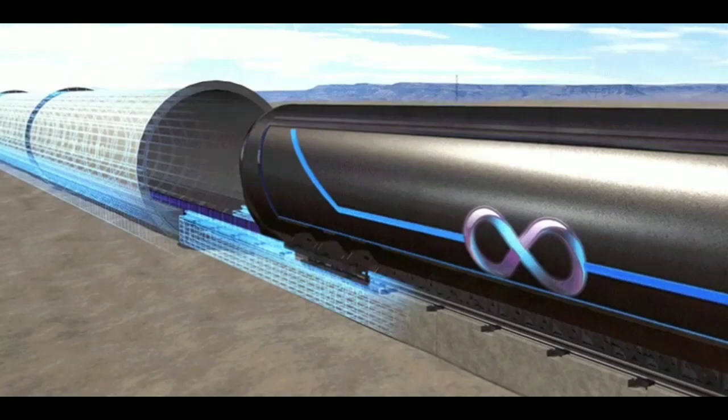Elon Musk's idea of Hyperloop is a reinvented creation. It came from the history of American offices and banks, as they have used PTT, the old technique of Hyperloop, called pneumatic tube transportation, for transportation of drugs, mails, files, and disk drives, etc. This was invented by William Murdoch.

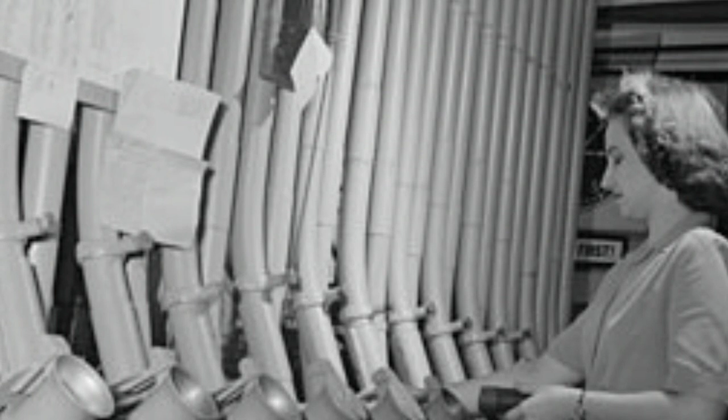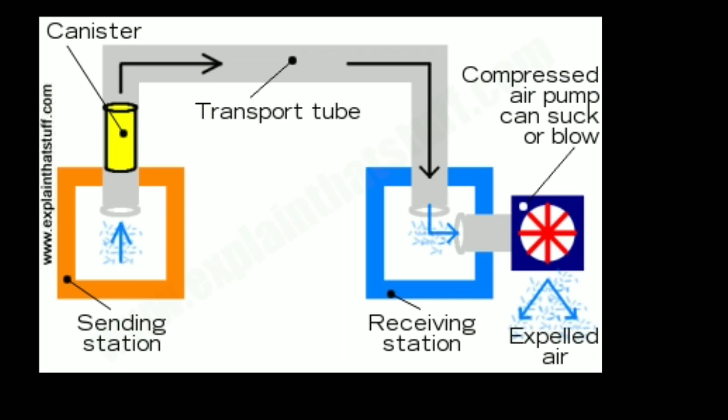This PTT propels cylindrical containers through a network of tubes by compressed air or by partial vacuum. Still, some banks are using this PTT transportation for their secret physical information packs to get rid of cyber attacks. This did not get into popularity due to heavy work and not being as fast as possible.

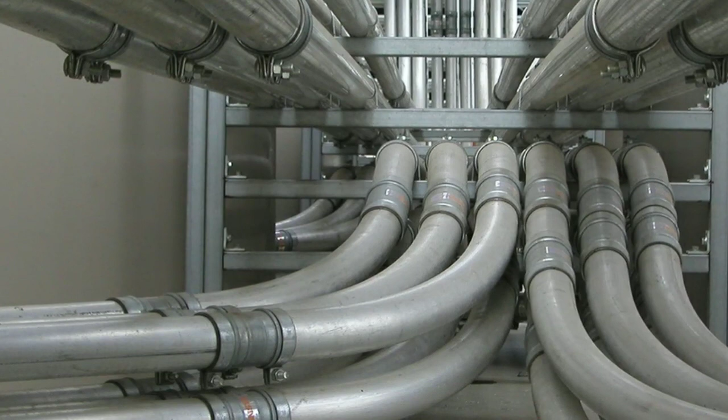These tunnels are a vast network of tubes in the underground. As this makes us limit our heights, we cannot redirect. A single tunnel is for a single route. We can't use it in intervals. These limitations were taken into account by Elon Musk, who proposed it as Hyperloop.

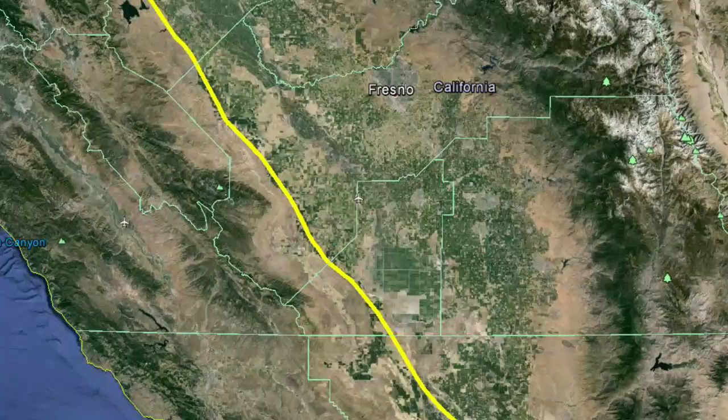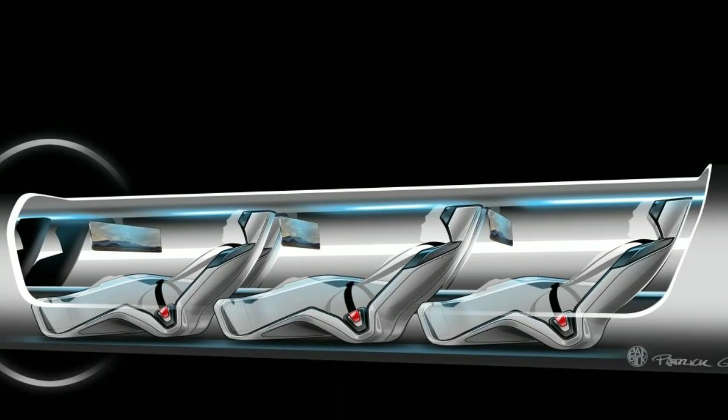The Californian government proposed a railway project from San Francisco to Los Angeles, and this takes lots of billions to construct and much more area to accommodate. The Hyperloop is the only way which takes less space, is less expensive and acquires high speeds.

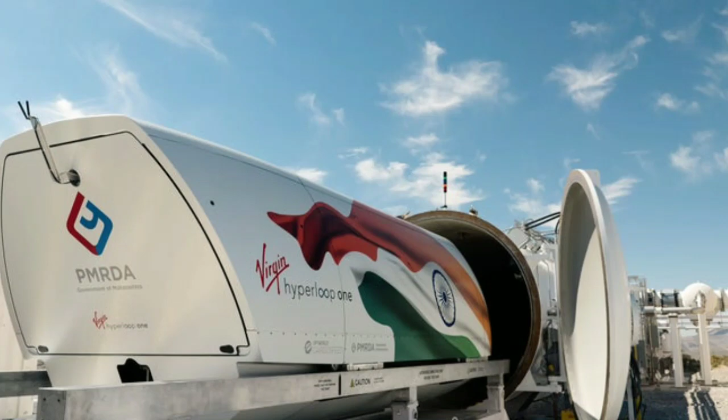This is the latest technology, which is constructed with two tunnels to and from San Francisco to Los Angeles. These two tunnels are placed on pylons and stacked on pillars. These tunnels are embedded with solar plates, which make energy for the transportation of Hyperloop capsules.

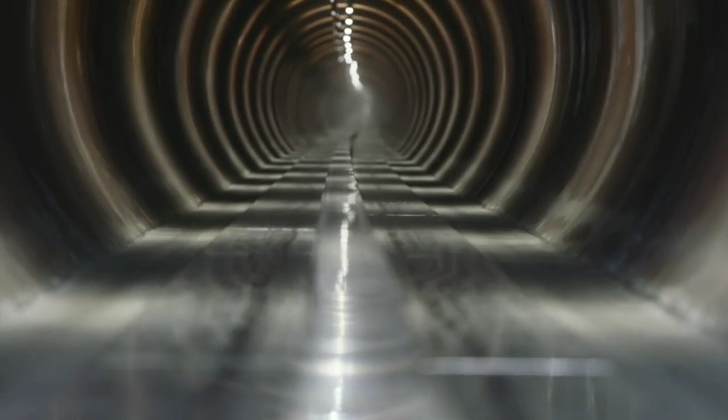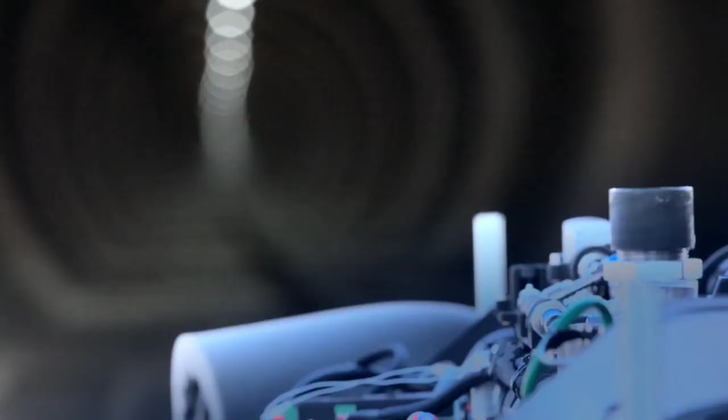These Hyperloop capsules have to transfer pressure from one side of the tube to the other side. So they have to overcome the Kantrowitz limit, which is the limit of pressure transfer in tubes. This is a physics term for the hydrodynamics in tubes. The hyperpod or capsule has to travel like a fluid inside the tube.

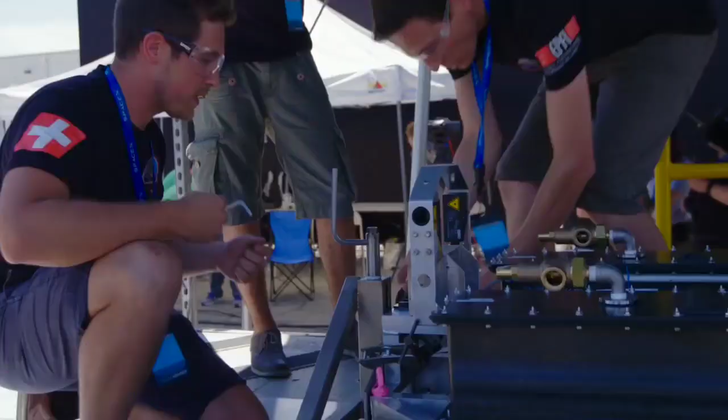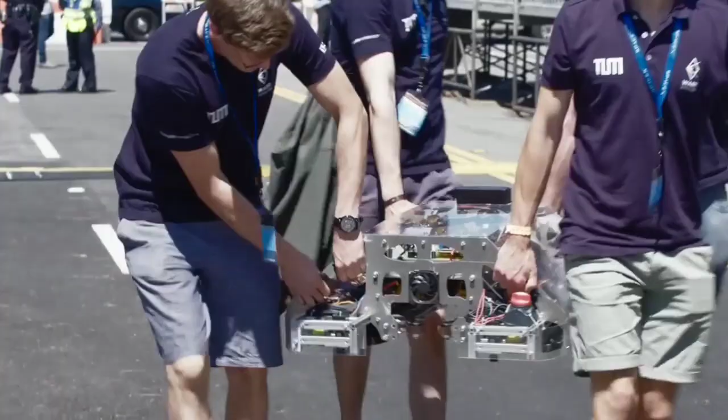So it attains 20 miles per hour with its linear induction motors. When it attains that top speed of 20 miles per hour, it has to levitate. This levitation takes place by its inductive magnetic motors, which create a magnetic field inside the tube, which makes this capsule levitate and attain its miracle, that is frictionless transportation, which is non-wear and tear transportation.

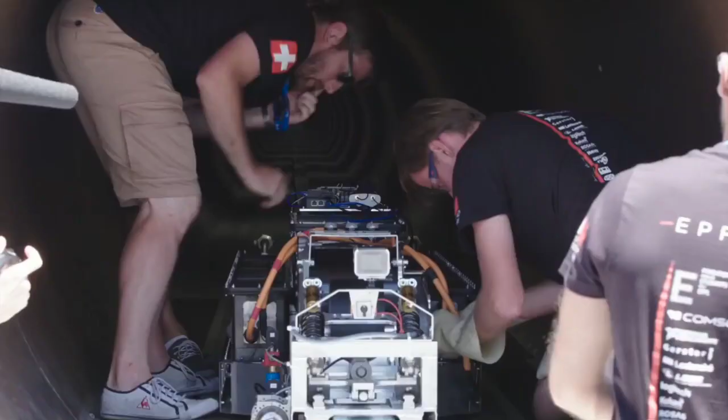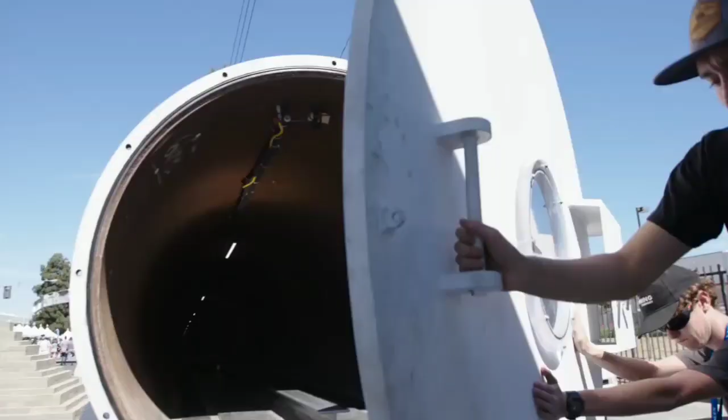The levitation of this pod makes it achieve a high speed of 700 miles per hour, breaking the record of the latest bullet train, maglev. So Hyperloop became the best idea for the Californian government to implement for its rail project.

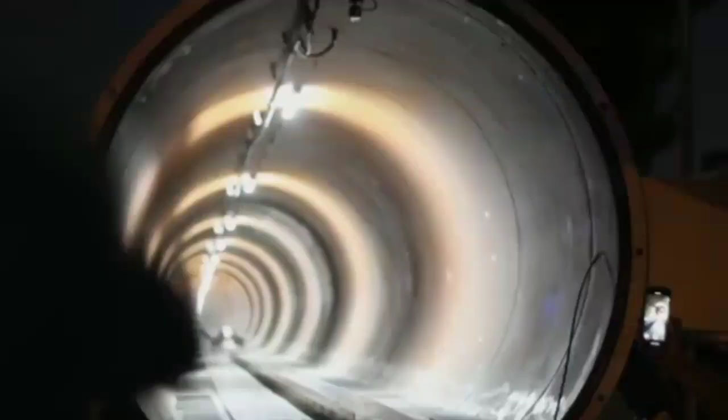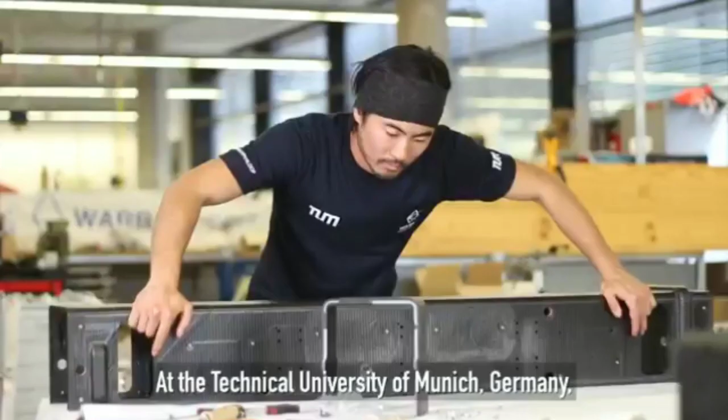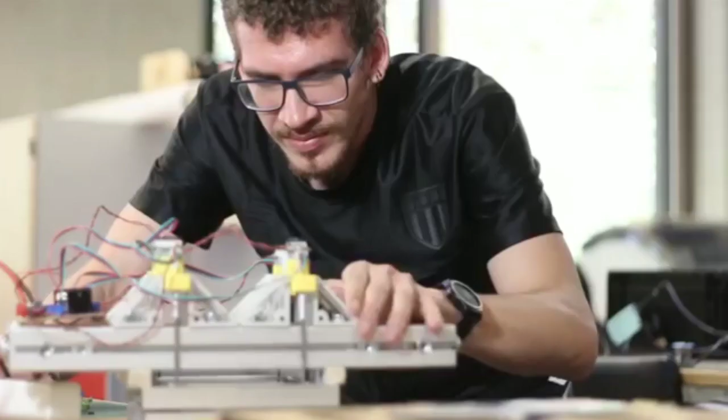In Germany, a team of students is working on a new transportation concept called Hyperloop. I do think that we are changing the future of mobility. It's definitely very crazy. It's also a lot of fun and a lot of hard work.

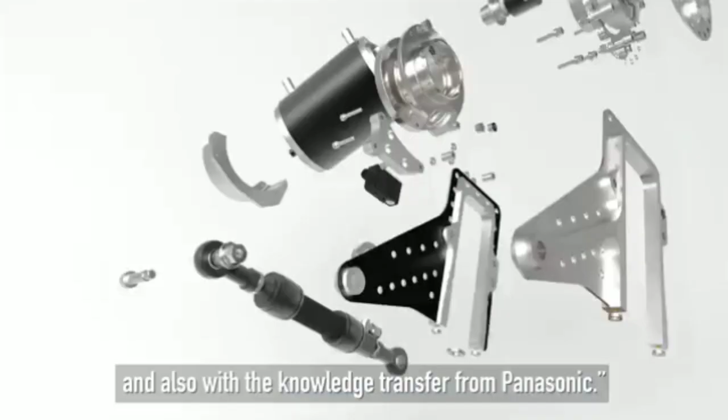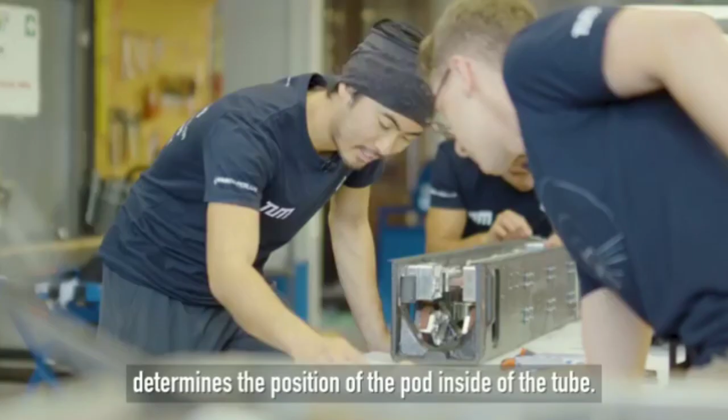A sensor from Panasonic Industry determines the position of the pod inside of the tube. To achieve this, the laser reads several markings within the tube while it accelerates to a maximum speed of 600 kilometers per hour. The specific design challenge for us is not only that the laser reads the marks, but also that this information is processed at a fast rate.

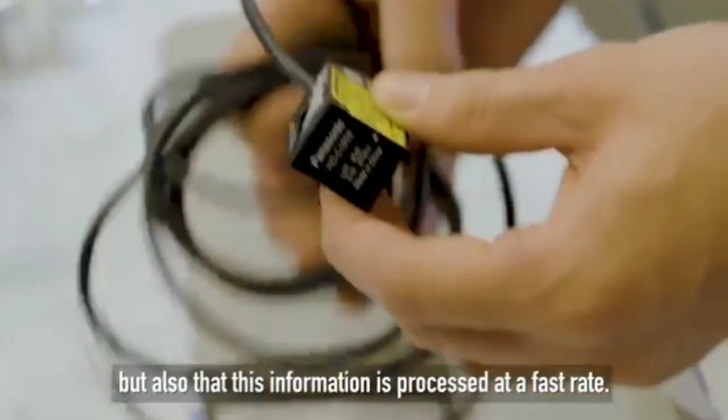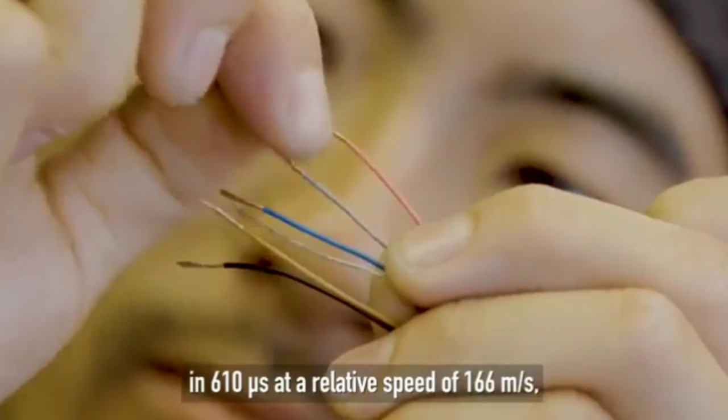The detection of these marks had the strictest timing requirements of any of our tasks. The 10 centimeter wide marks pass in front of the laser sensor in 610 microseconds at a relative speed of 166 meters per second, which demands a 1.6 kilohertz minimum sampling rate.

Panasonic Industry laser sensors are a great fit for this challenge, as we can rely on their robustness against disturbance and environmental influences. Plus, they are very small and lightweight, which are key criteria for us. It takes about 10 months to build a Hyperloop pod.

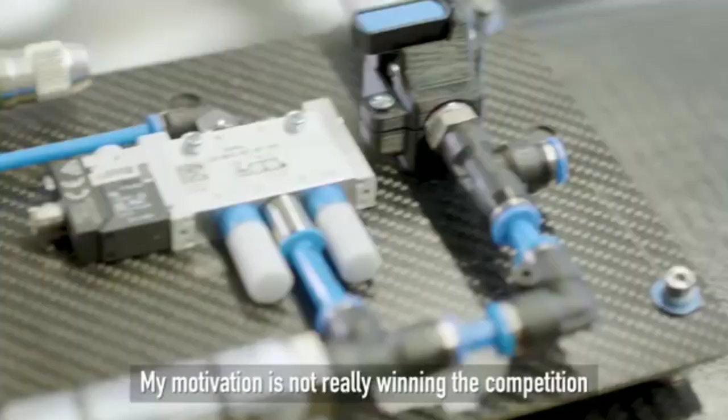As this event is a students' competition, I expect to learn a lot. My motivation is not really winning the competition, but to learn as much as possible about computer science, about electronics, and get familiar with the industry also, as we have contacts to partners like Panasonic Industry.

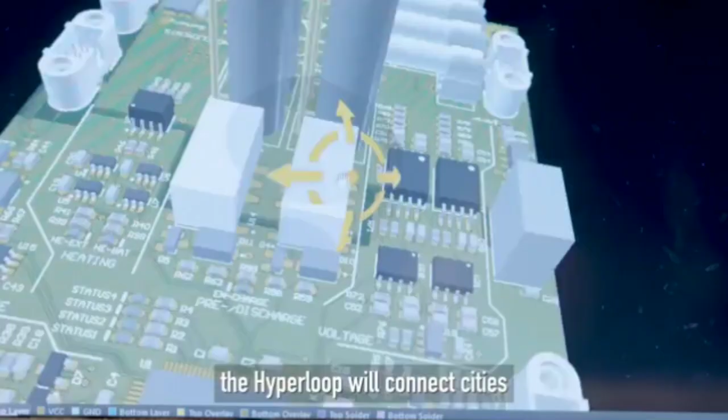The Hyperloop is not a pipe dream. Already this year, you will see several big announcements, such as Virgin's Hyperloop One. At supersonic speeds, the Hyperloop will connect cities like Munich and Berlin within 30 minutes.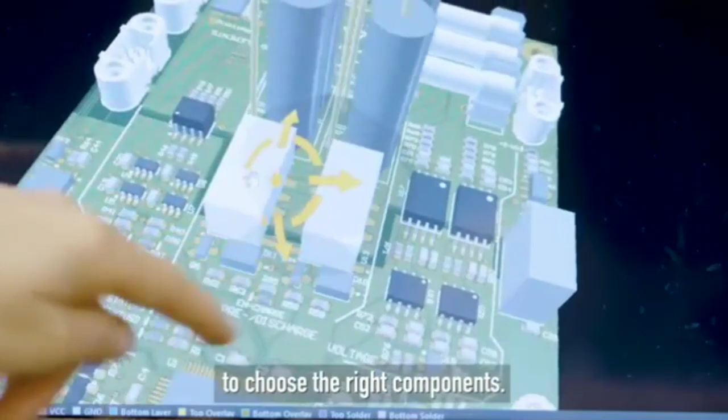Panasonic has helped us a lot with different components, to choose the right ones. For the controlling of our subsystems, we picked Panasonic's relay, which convinced us due to its high density mounting, low operating power, and due to its small casing.

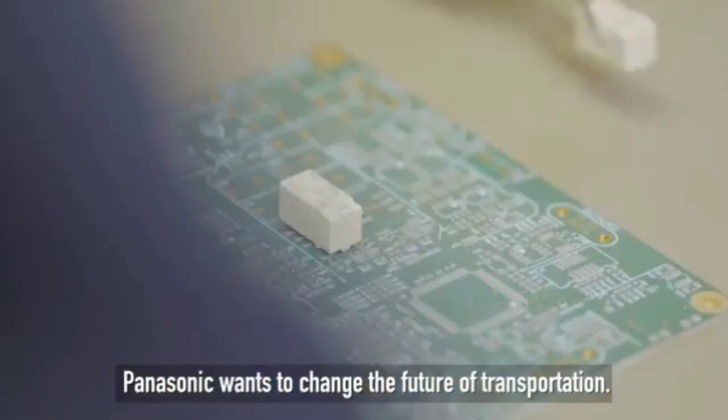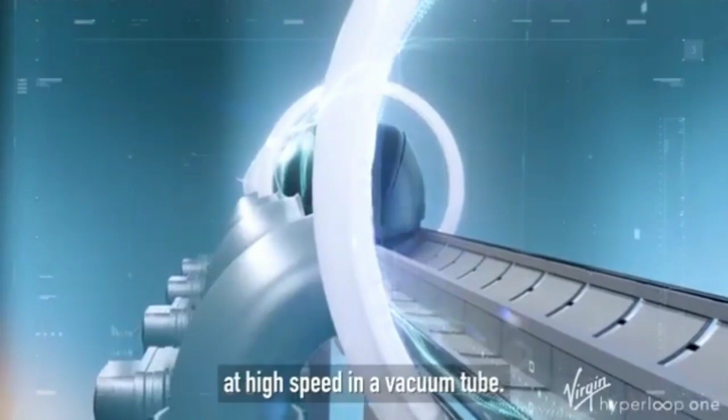Panasonic wants to change the future of transportation, and so do leading mobility companies worldwide by pushing the Hyperloop transportation concept. The idea behind it is simple: a floating train being propelled at high speed in a vacuum tube. Usually to levitate, you can use either air bearings, basically blasting air to levitate, like air hockey tables, or you can use magnets. When you do that, you create levitation.

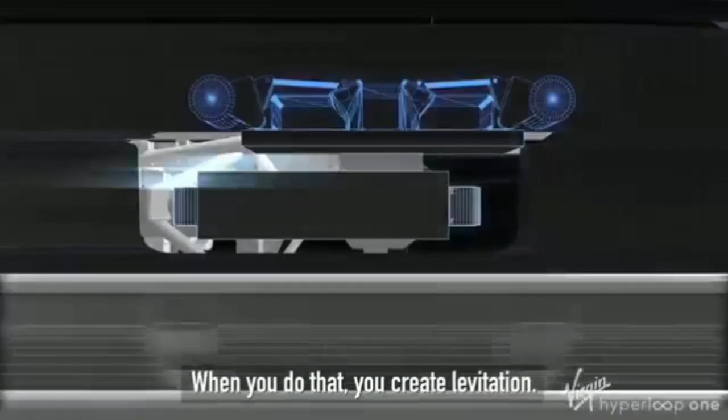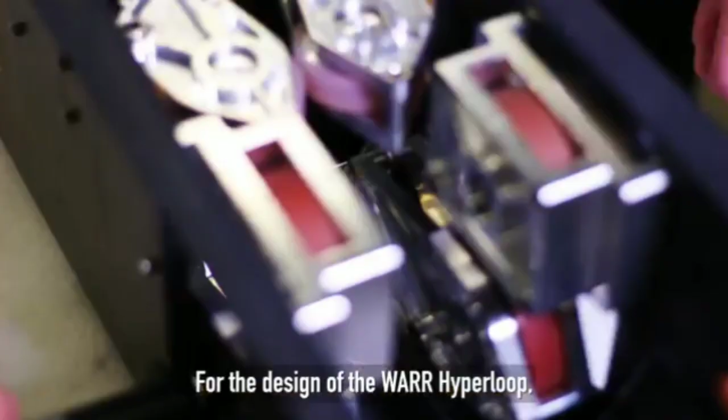Linear induction motors then propel the pod along the tube. You get pushed at high speed, and you will stay at high speed a long time, because you don't have any friction from the ground, and you are in a vacuum. For our design, we have decided on a third way, using wheels for acceleration until lift-off speed is reached or it needs to be braked. Using an electric motor guarantees us the best possible acceleration. Based on that, a cooperation with Panasonic Industry was a logical and necessary step for us.

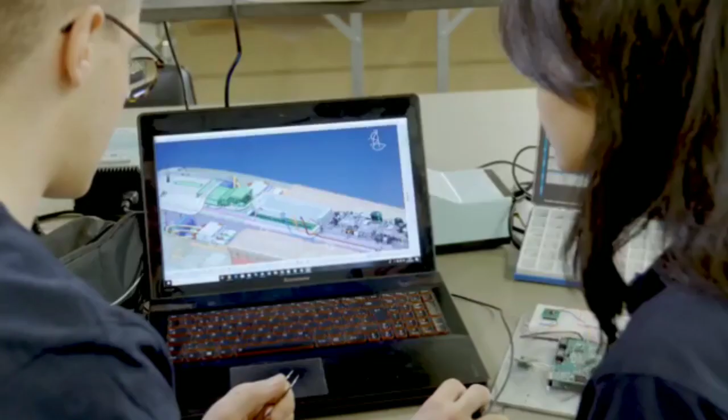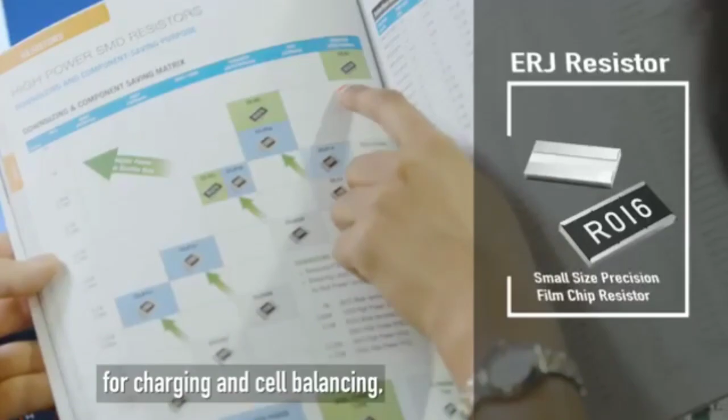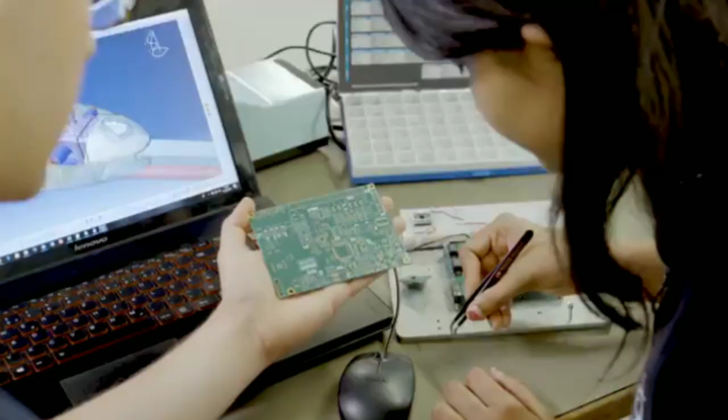Within the electronic battery control systems for charging and cell balancing, we are looking for any advantages that can be gained in the critical areas of stability and reliability, both vital factors in securing a pole position for our Hyperloop pod. Panasonic supported our Hyperloop by providing thick film chip resistors. While the Hyperloop idea may be simple, the engineering is not.

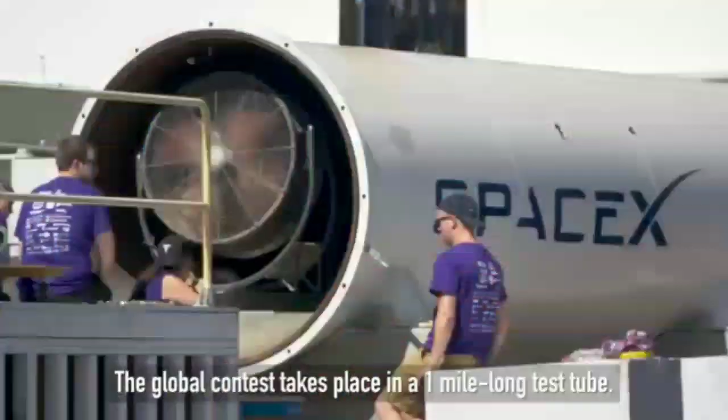In the summer of 2018, the third global Hyperloop pod competition took place at the SpaceX Center in California, USA. It is going to be my first time going to the USA to participate in a competition. Los Angeles, California. The global contest takes place in a 1 mile long test tube. We do have high hopes. There's lots of things that can go wrong, so we are trying to be careful.

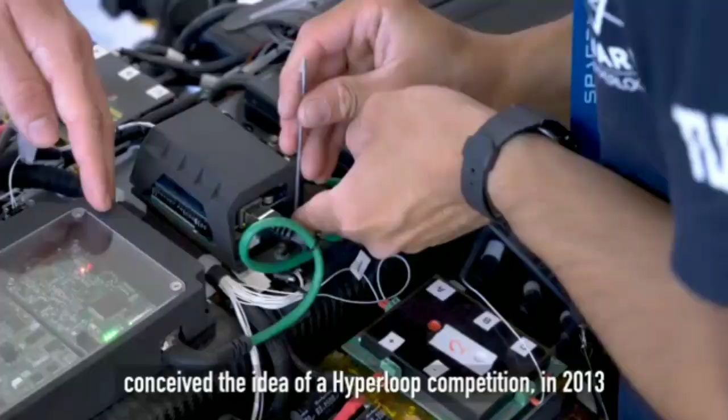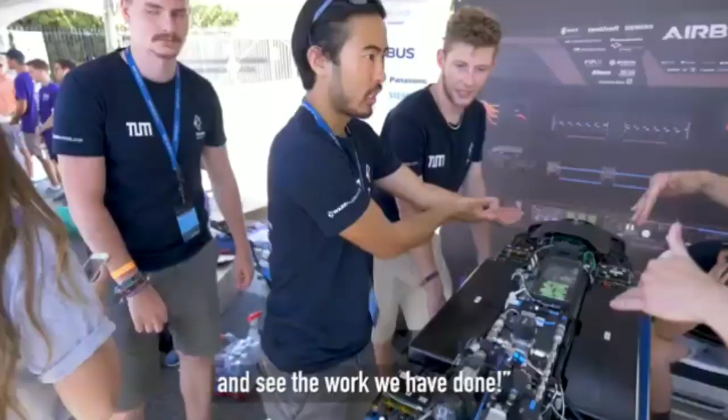Elon Musk, founder of Tesla and SpaceX, conceived the idea of the Hyperloop competition in 2013. I really think that we have a very good team and that we can go far. And I think it's time to test our pod and see the work that we have done. The team is competing against other engineering students from around the world. The big challenge now is to have nothing go wrong. At this point, we are going to hand it over to Team WARR for their final pre-race countdown.

...projects Panasonic is working on for a sustainable mobility future. We look forward to many additional wins of the Technical University of Munich's Hyperloop project supported by our technologies.